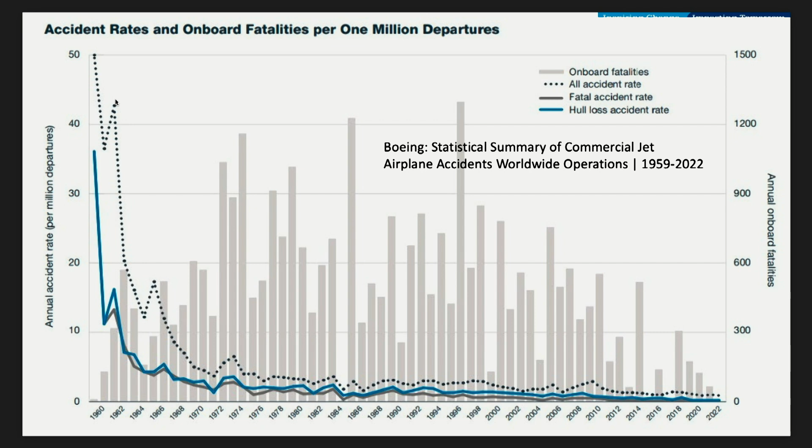And the historic approach was to focus on single point failures. Make certain that you didn't have some unwitting accident. And looking back through aviation safety, we have those flashbulb moments, those accidents that we in the discipline remember profoundly and that the entire industry used to drive our new insights as they reflected what was going wrong.

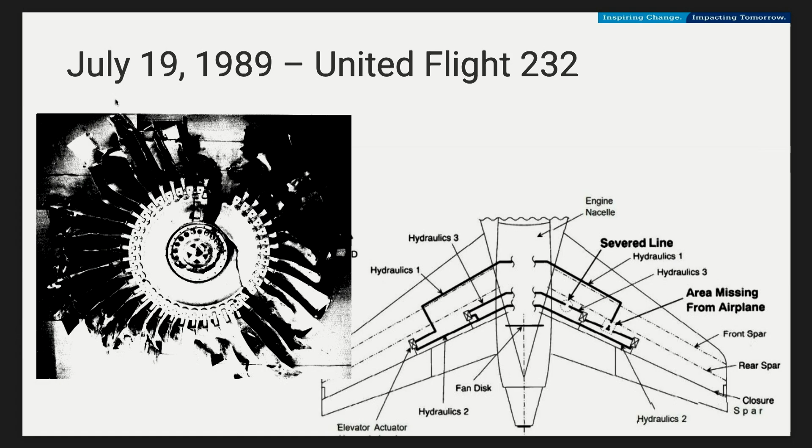For me, perhaps the first flashbulb moment, and one that's really important to this more modern age, was United Flight 232 in July of 1989, where the fan disc in engine number 2, which was mounted in the tail, right above where the 3 hydraulic lines all joined together, needed to power the control surfaces, well, the fan disc blew. And while there were many things leading up to the fan disc blowing apart and blowing through the hydraulic lines,

it, in the end, highlighted that at that instant in flight, given you had a fan disc that had design and maintenance issues, that in flight we had a single point failure. Now, I particularly recall this because I was a freshman in what was then called the MIT Aeronautical Systems Lab. We gathered around this thing called the TV and watched live news to watch it.

And the McDonnell Douglas engineer who was briefing CNN was holding a schematic and pointing everything out, and his brass rat was going up and down in front of the national news as he described just how we had gotten to the point that one single failure could make an airplane, well, at the time they said it should have been considered unflyable.

The second lesson that we learned that day is that in many cases, safety ends up being a factor also of people being able to come together and work together in new ways. For Denny Fitch to run back from his passenger seat and be able to work the throttles while the crew already in the flight deck flew around a while, learning to fly the airplane only with differential thrust and elevator trim, to the point that they had something roughly approximating a landing, and something where we would have expected everyone to not survive, to instead have 2/3 of the people survive.

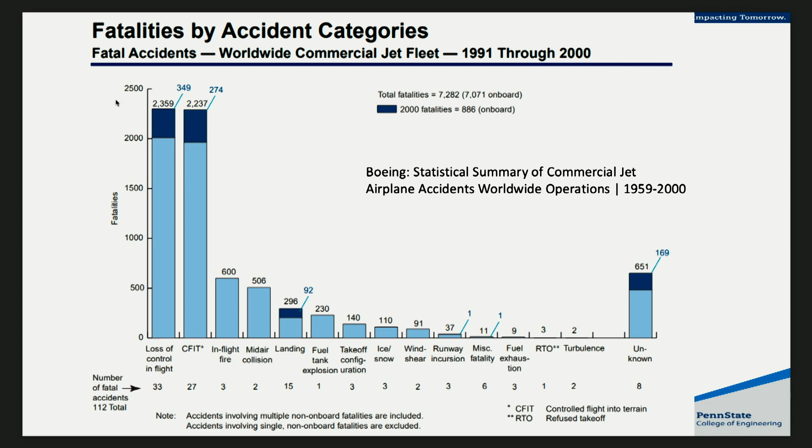And with this, here's the data on jet aircraft accidents for the period 1991 through 2000. It's divided, each bar representing a different category of the major descriptor of the type of accident. In this case, look at the two big bars that we had in the 1990s, the leading types of accidents, loss of control, and next to it, CFIT, controlled flight into terrain. And the Cali accident is a major part of that big bar of the fatalities that we were seeing because pilots couldn't tell where the airplane was going relative to terrain.

Let's skim forward to the most recent set of data that I have, 2013 to 2022. Can you find CFIT on there? It's down there. It's down in the noise. It's one of those small bars. And so we can see cases where some of these advances we can point to as having such profound impact, like the enhanced ground proximity warning system.

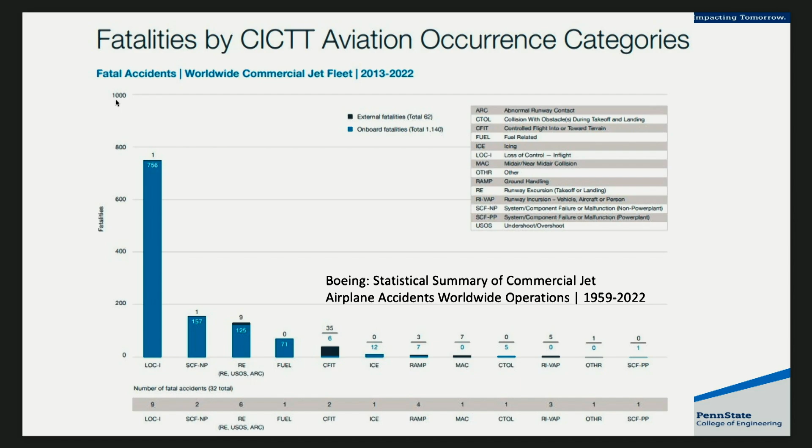That's the good news. The bad news is that how do you make a system safer than this? How do you address the more complex and interrelated accidents? For this, I would point out that you have to do many things all at the same time. As engineers, we normally start by looking at the single point failures, the reliability and redundancy, the fault tree. And this is necessary, but is not sufficient.

Then we look at creating multiple layers of defense, robustness. And these layers of defense can include pilot training, procedures, and maintenance, and making certain that the pilot doesn't have the fan disc blow apart in the first place. Necessary, but again, not sufficient.

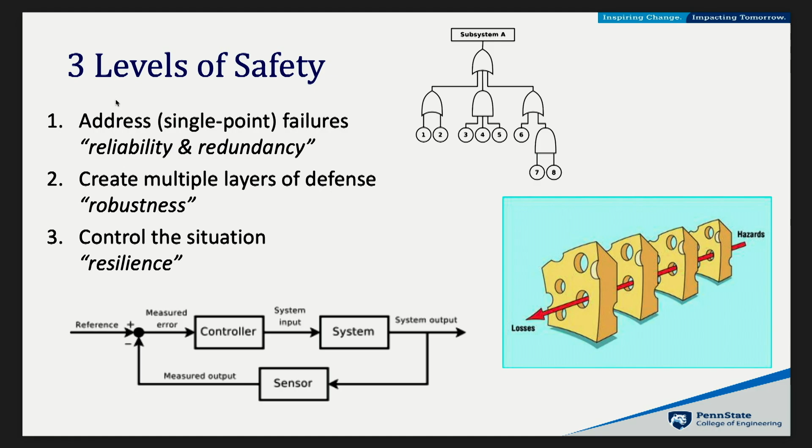And finally, we find that we have to also look at how we control the situation. And the levels of control, again, are operational control, traffic flow management, so you don't have a pileup of airplanes in the same sector. But specifically important is how do we control the situation right at the point of the incident, of the problem, the pointy end of the stick.

Now, there's multiple layers of control, but hey, it's always fun to talk about autonomy and autoflight and to talk about how control automation has shaped the flight deck. So here's a picture of an aircraft designed and first flown in 1969. You can see that there's 4 throttles, 4 stacks of engine instruments, and there's even a flight engineer over here, a third pilot in the cockpit. So I hope you can guess, if you're in this auditorium, what airplane this was.

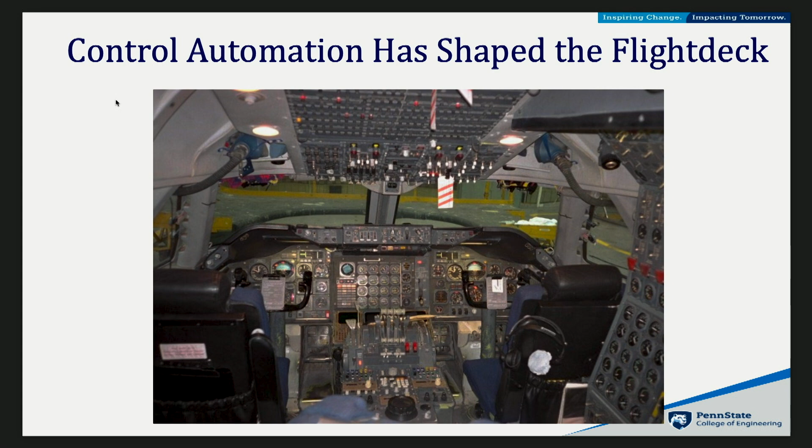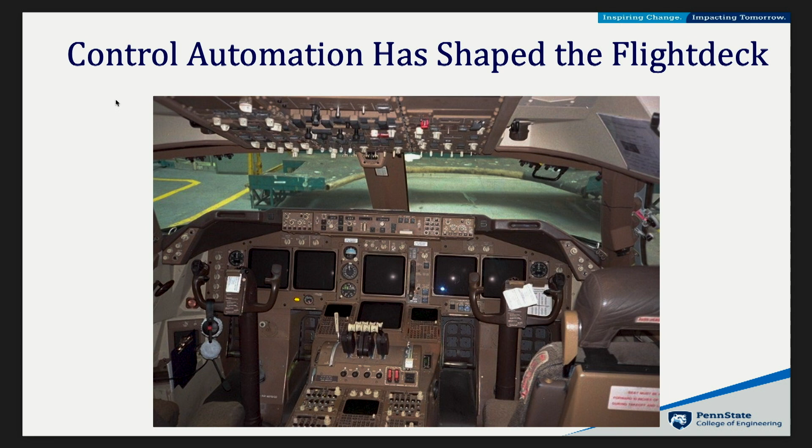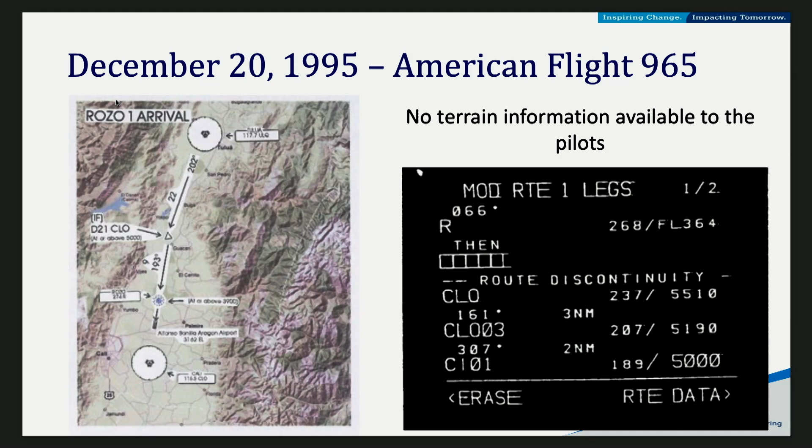And why did the airplane try to fly through a mountain? Well, the airplane logic was suggesting go to waypoint R and then join the route into land at Cali. And the pilots had very poor understanding. What does this mean? Should I have even gone to point R in the first place? And the answer is no.

And so here now, we're also starting to think not just about the single technology, but how do we get the parts to work together? How do we get, particularly close to my own heart, the pilot and the technology actually working together better?

And again, we can point to some things in this time in the 1990s where Eric Johnson and I met each other by doing a class project for Tom Sheridan and John Hansman, where we proved that in the Building 37 simulator, it was pretty easy for me to put the captains in what would be an innocent mistake into a steep descent into terrain, and most of them to not detect it until it was too late to pull up.

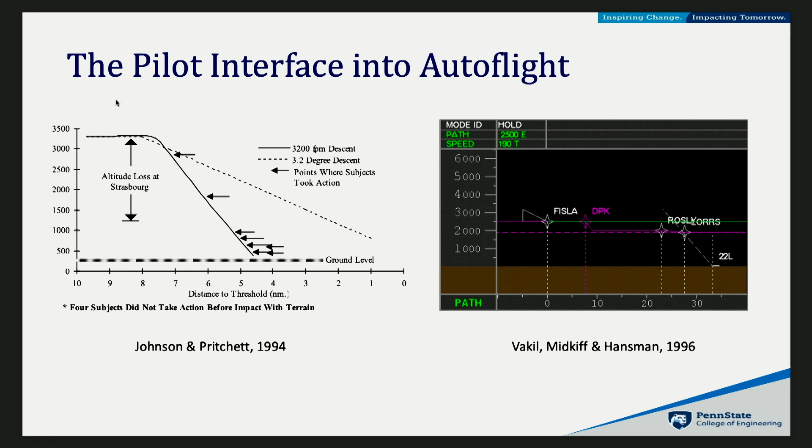And on the right, I'll show the vertical profile display, recognizing Sanjay Vakil, Alan Midkiff, and John Hansman here, that emphasizes not just where are you in space and time in a vertical profile, but where is the autoflight system going to take you with the way it's programmed right now. A display that I think we can now pretty much point to in the A380, 787, and other subsequent aircraft.

So with this, we're working on many new questions about how human and machine interact. We haven't answered them yet. Aviation, I think of as the leader in human factors. And for this, I point out that in 1951, it was a National Academy study chaired by Paul Fitts looking at effective air navigation that posited this model, a model I wish could be burned at the stake and tortured for its value that it doesn't have, called "Men Are Better At, Machines Are Better At."

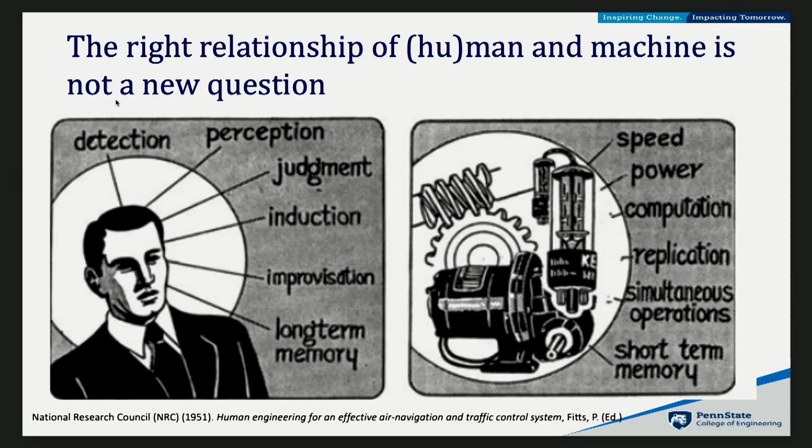And I mind not just the genderized language, but the fact that it doesn't understand that the two of them need to interact, and it doesn't understand something fundamental about who ultimately controls the situation. For that, I think we should go back to the federal aviation regulations. Who controls the situation? The pilot in command of an aircraft is directly responsible for and is the final authority as to the operation of that aircraft. And what does that mean? It means that as the captain, you engage the autoflight system.

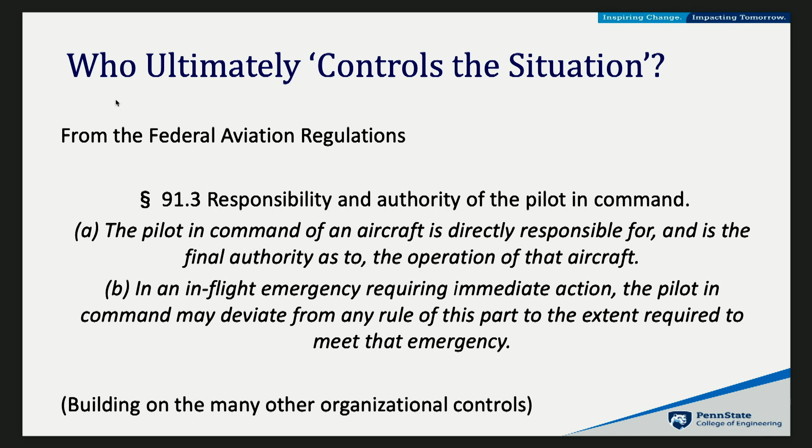There's a 1996 Simpsons episode. It says, once you engage this Navitron system, all you have to do is sit back and feel your ass grow.

We're not recording this, right? I'm just quoting The Simpsons.

Okay. But no, as the pilot in command, you now have to sit there and monitor it. How often do you need to monitor it? As fast as it can screw up. For an autopilot, that's pretty fast. And then you need to figure out when to intervene, and to intervene before it is critical. And this is not easy.

Now that I'm a department head, I can assure you, monitoring and supervising and intervening is harder than just doing the task yourself. And yet this is the task that we are putting pilots into. To put them into a tough spot, we say that their role is shifted to monitoring.

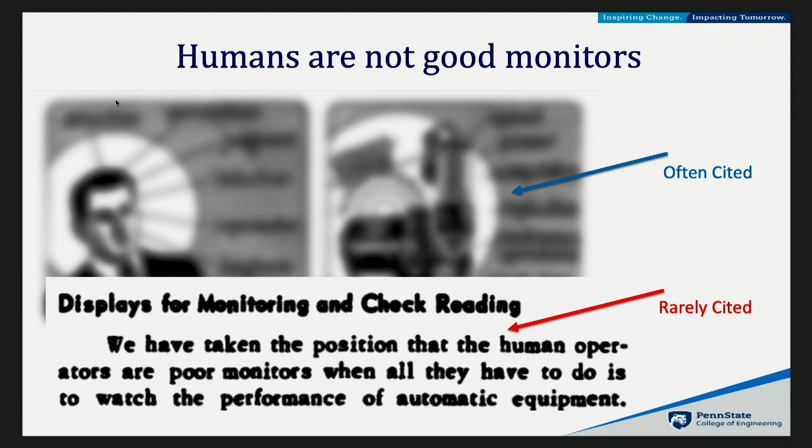And yet, there were brilliant things said before in that 1951 report. The MABA-MABA list was embraced by the controls and autonomy engineers as, yeah, I can get my machines to do these new things. And it's commonly cited. Rarely cited is what's on the next page. In 1951, they took the position that human operators are poor monitors, when all they have to do is watch the performance of automatic equipment.

And so with this, we are at a very interesting time where we are seeing public-private partnerships in aviation safety, broad discussions throughout the industry talking about, wow, what do we need to do differently? Not just focusing on one system or one technology, but looking at broad operational principles.

And so now moving forward to 2013, the safety alert for operators was actually recommending that we have pilots fly more often. Maintain not just the manual control skills, but we're now finding that you need those same manual control skills also to have the mental skills, the knowledge, the task ability to monitor in the first place and detect when something is not going right.

Finally, bringing us up to the very latest stage, pointing out some things again from the national academies that we're working on, we find that the same names keep popping up in these national level committees that are coming together to look at the current state of aviation safety.

In our overall review of the aviation industry's ability to identify safety issues, our summary is that there are many ways that we are monitoring air transport safety right now, as based on the tube and wing aircraft that are flying, the operational models that we have at this point. They span from single organizations to industry-wide teams like the Commercial Aviation Safety Team. They span deep dives on particular hazards to things that are monitoring system-wide.

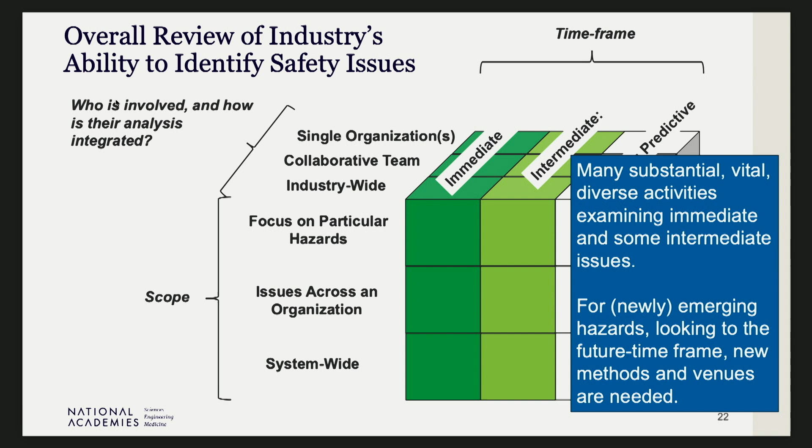And in this, we now have the mechanisms in place to be jumping on any immediate issue and extrapolating forward. What do we think are the intermediate, potential near-term evolution issues? But the predictive is a little hidden off on the right of the Rubik's Cube. Predictive, how do we predict the safety of something that's never flown? Some new AAM vehicle that's brought in, or eVTOL aircraft flying with a very different business model, very different traffic density and traffic operations. For this, we need new methods and new timeframes.

And this is in the face of all the amazing things that are happening in aviation right now. Each of these things we can look at going, wow, we can do new business models. We can have transportation that gets above the gridlock of Mass Ave. We can have new technologies that are so much more efficient. We can help with sustainability and climate. But at the same point, we also then say, and how do we predict the safety impact to maintain the safety level for things that we don't have that same weight of knowledge for?

An interesting time. If I had an answer, this would have been a different talk. But as it is, I'm just saying this is where we are now with big questions left to be answered. And so I thank you, and I offer apologies to similar important technical advances in addressing aviation safety, including icing, wind shear, collision avoidance and detection, and so forth. Thank you.

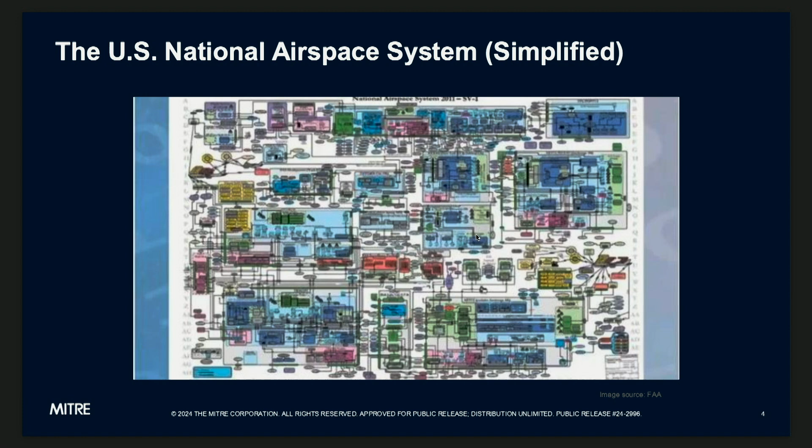And finally, aviation is all about weather, also terrain, but also all about weather. And as I went on to my career working on the National Airspace System, I really began to appreciate all the ways in which that is true. Now, one of the things that I found as soon as I left MIT was that I was now at a company that was supporting the entire development of the National Airspace System, and I lamented the fact that the one course I never took in aviation at MIT was air traffic control. So I had to learn all of that.

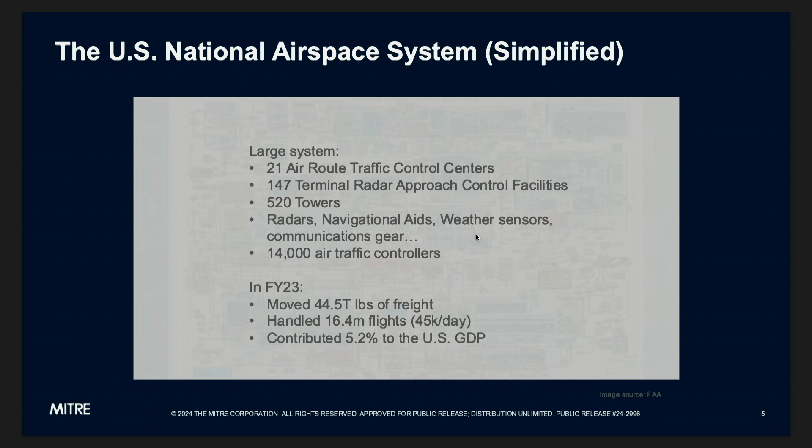Safety is the #1 priority, and as Amy noted, the current safety record is excellent. And so everything that needs to be introduced has to be compared to that record, which I'm sure Brian will probably get into later. So over the 31 years since I graduated, a lot of things have happened in this system. There's something called the Next Generation Air Transportation System that was deployed, and this revamped all of the primary automation systems.

There were a lot of jokes back in the day about how the FAA ran systems on vacuum tubes. To my knowledge, there are no more of those. I'm not entirely sure. There may be in Alaska some weather systems that have vacuum tubes in them, but for the most part, the system has been deployed, and we move a lot more people and freight today than we did back when I graduated, and the delays are generally not worse, which tells you it's working.

So that's kind of the state of the art. Over the course of that time, and where much of my work was, is in that the science of air traffic flow management has changed radically. Back in the day, 31 years ago, the FAA controlled everything. Now there's a collaborative decision-making process where the airlines and the DoD and other operators take part in the management of the system, and that's been a major advance.

Weather forecasts have improved, traffic management tools have improved, and so our ability to do more than just keep aircraft from hitting each other, but rather to make the whole system more efficient has improved. And we've gone to something called trajectory-based operations, and what this means in practicality is that when things get incredibly dense at an airport, we can manage the flow by time of arrival. And because of the deployment of GPS and other precision navigation systems, aircraft are much better at following those things, provided that the pilots are interacting with the system and not just watching it happen, right, as Amy was just talking about.

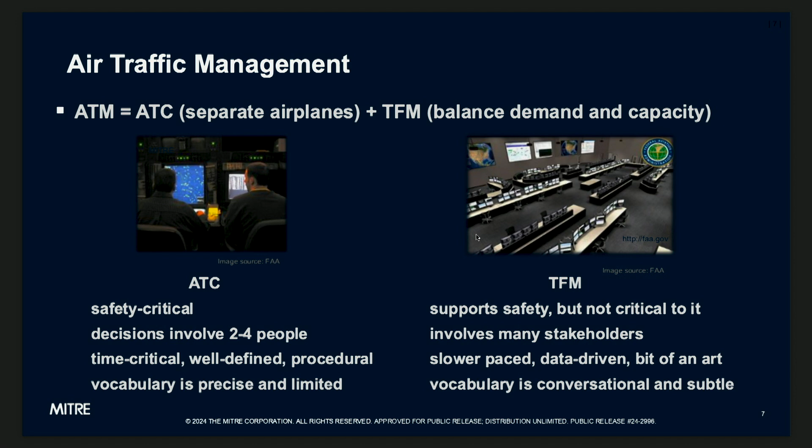But traffic management, where you're looking out, say, 30 minutes to 24 hours to plan against things that are probably going to happen, is something that has been evolving quite radically over that time. And it involves many, many stakeholders. It's a bit of an art. And honestly, there are a lot of still unsolved problems in this. And so that's where I'm going to spend a good bit of the time in this lecture.

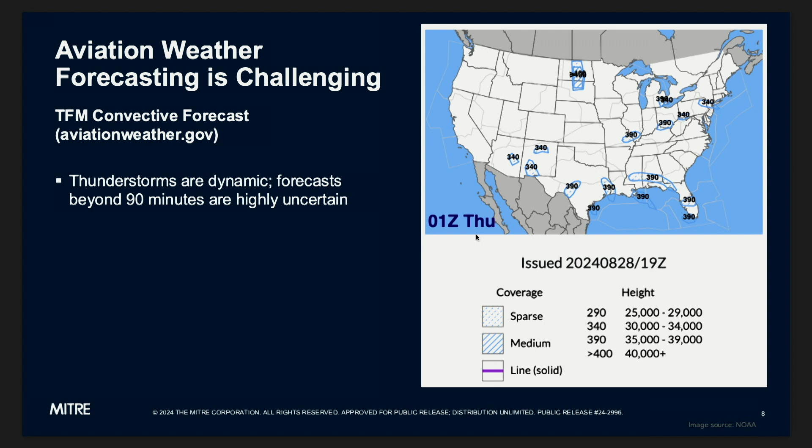So to get back to weather, aviation weather forecasting is challenging. It's one thing to know if you're going to hold a picnic that there's a 30% chance of rain this afternoon. You need much, much more precise weather to do anything with aviation. You need to know whether particular routes will be closed, whether airports will be closed, or will be impacted by low visibility. This is an example of the absolute state of the art in long-range thunderstorm forecasting. Each of those areas, which are hundreds of miles long, tell you that there's maybe a certain likelihood of thunderstorms happening and what the likely tops of those would be.

Planning to this is not trivial, nor is it precise. And so the essence of the modern system is flexibility. You have a lot of tools to manage flows, and so the challenge is how do you react to something like this? Under 90 minutes, we know we can watch thunderstorms move, and we have a pretty good chance. So what I'm going to talk about are some of the tools that I've been involved with developing, applying the lessons that I learned here at MIT to help develop and deploy, and some things that we haven't solved yet.

So one of the first things I got involved with when I left here was in trying to support this collaborative decision-making process by giving traffic managers what you would think would be a very simple thing. There's weather. We have a pretty good idea of where it's going to be. How do we know which airplanes are going to encounter it? And what do we do about it? So again, simple problem. They had no way to do this, right? You were doing this incredibly manually.

And so we actually put a trailer out at one of the centers and put a bunch of computers in it, and we let traffic managers come out and play with it, looking at the real data and do some tests, to get back to human-centered design. And come up with a system where you could draw a polygon or a line, and you could add a bunch of filters to it, and it could move. And what it would fundamentally give you in the middle of the screen there is a list of which flights were involved and how many were encountering it as a function of time. And what we found was if you give them something like this, and it was deployed in what was then called the Enhanced Traffic Management System, they would find a million ways to use it.

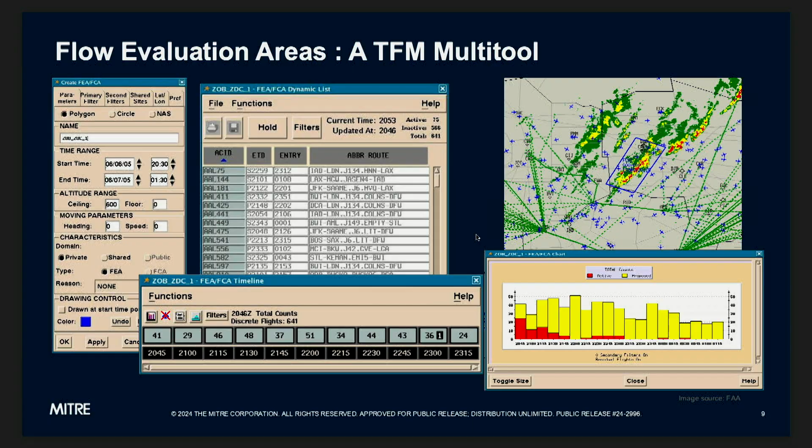And so this tool actually is the basis of a lot of the things that cause your pilot to say, while you're sitting on the runway in perfectly clear weather, we can't leave because of air traffic control hold. That's actually a good thing, believe it or not. But there are things called airspace flow programs that keep us from overloading sector controllers near these weather areas, and a whole host of other what we call traffic management initiatives that are planned by the use of these

things. And one of the things I learned from this was that if you give people a flexible tool, they will find all kinds of innovative ways to use it that you probably didn't even predict. But the most important thing about giving any kind of tool to people who have essentially a full slate of work on their plate is that the first thing it has to do is save time. And that's what computers are good at. Have the computer do the things that are drudgery, the things that are difficult, right? But have it be an interactive part of the process. And this was a great example of that.

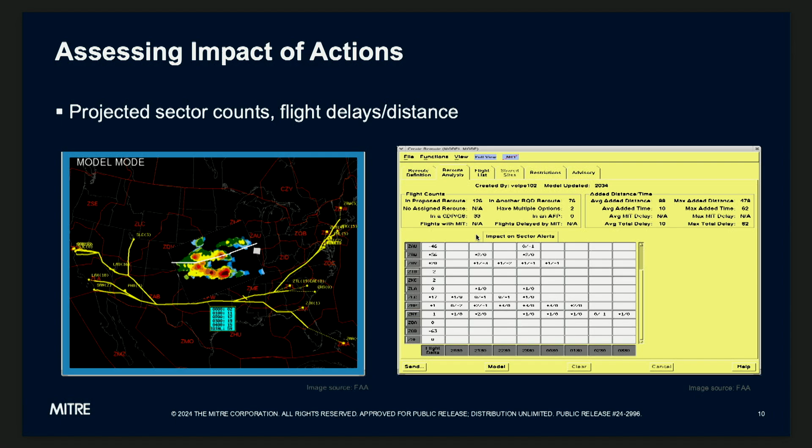From the time that this was developed to the time that it was deployed was 17 years, which is on the long side. I think the average time to deploy a new feature to the NAS is about 10. But this is what happens when you're working with a system that has to work all the time. And it's an argument I get into with my military colleagues all the time on the other side of MITRE, where they can deploy something in 2 or 3 years, and the difference is ours have to work all the time. A military system can work 95% of the time and still be acceptable and still give you an advantage. And that's a huge difference when you're working in an air traffic control system.

The next step beyond this was to start thinking about systems that suggest solutions. And this is an example of one that we worked on, and it employed some NASA ideas as well. But basically, the idea would be, instead of having to develop those routes and do what-if examples to test them and so forth, you could actually identify, for each aircraft involved, what would be a reasonably optimal route to get around a weather situation, coordinate it. And one of the big problems with rerouting is you have to collaborate amongst facilities. And so this would automate that coordination.

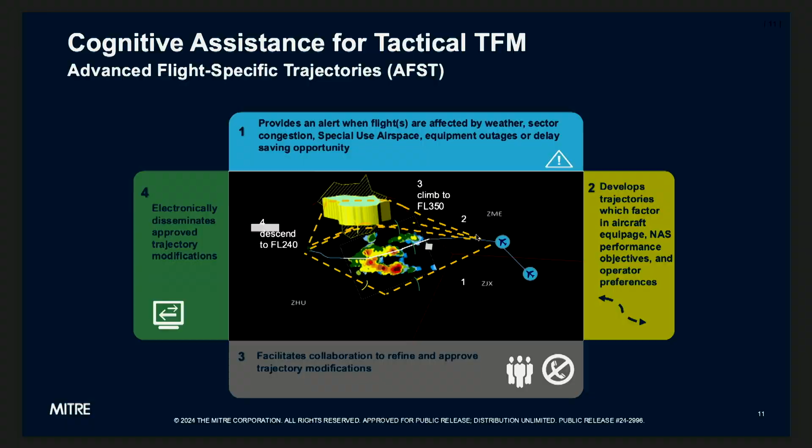Again, we did a bunch of human-in-the-loop testing and worked through it until they were satisfied with it and thought it would work. It was put into the deployment pipeline, and then the funding dried up. But it is a possible thing to do. It's still potentially on the list, so maybe someday we'll see something like this. But to date, we don't move aircraft one at a time. We move them in giant groups. So that's still the state of the art.

And the last system I wanted to talk about was the problem of strategic TFM. The stuff that I was talking about before, you saw pictures of weather. That means we had either weather radar returns on there, or we had short-term predictions where you could actually draw essentially where you thought the weather was going to move. But strategic TFM uses that initial weather picture that I showed, which is that I have a vague idea of where the problem's going to be 12 hours from now, 6 hours from now, whatever it is. And I have a bunch of aircraft that are going to take off and maybe spend 5 hours in the air. What do I want to do?

There's a couple of problems with this situation. Number one, typically when humans are solving a problem, they rely on past experience. You never get the same weather day twice in the NAS, really, right? And so it's very hard to learn from experience.

The other is you have a bunch of stakeholders involved that have different objectives. The FAA folks want to protect their controllers so that they continue to safely handle the aircraft. Airlines obviously want to meet their schedule. DoD wants to execute their mission, so on and so forth. And so it's not clear what winning looks like either. So it makes it a hard problem to solve.

So the way we do this today is that every 2 hours there's a teleconference where we argue about what the right solution ought to be and pick some set of solutions out of an infinite design space and then see how they work. And then 2 hours later, you go back and have another argument and work on the next thing. And so for years and years, we've been trying to design systems that would solve this problem.

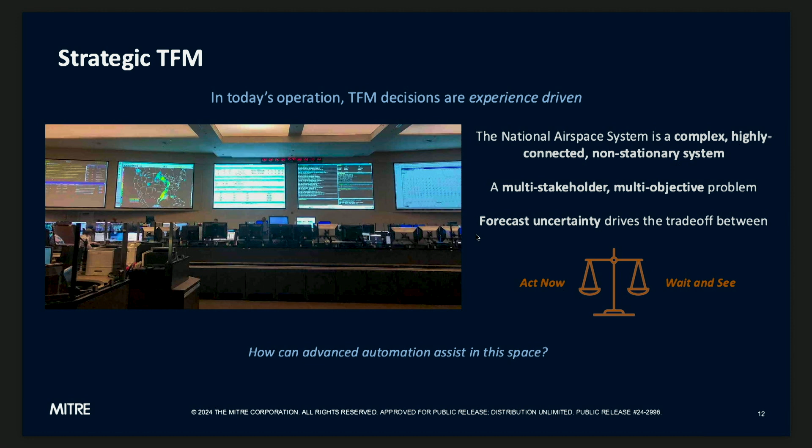You're looking at a picture here of the Air Traffic Control Command Center in Northern Virginia, where they coordinate this argument. And the data that they have is the weather forecast that you saw and some other weather forecasts. They have counts of traffic around the area. And of course, they still use those flow evaluation areas that I showed to kind of look at what traffic is where. But there aren't really any diagnostic systems to do that.

So you can't have a talk today about aviation without AI coming into it someplace. And so this is where we're trying to apply modern artificial intelligence to solve that specific problem. And past attempts to solve this problem using previous kinds of technologies have generally failed due to the same reason that it's hard for humans to solve this problem, which is that it's very hard to draw conclusions about what worked in the past because you don't really have great data to work from.

Modern machine learning systems, it turns out, can piece things together pretty well from a whole variety of vaguely similar situations and draw better conclusions. And so for the first time, we think we've found something that can help people navigate this enormous design space. And to give an example

of what these kinds of problems are, I don't know, what's the time situation? I haven't lost track. We're good? Okay. So I'm just going to go to this, actually.

To look at a real example, here's a very simple air traffic management example. Something's happening, in this case in the Atlanta area, and you might have low ceilings at the airport. They'll reduce the arrival rate. You might have weather that's occluding the fixes that supply that traffic to it. And you could say, well, I could control with a ground delay program the arrival rate over the next, say, 4 to 6 hours.

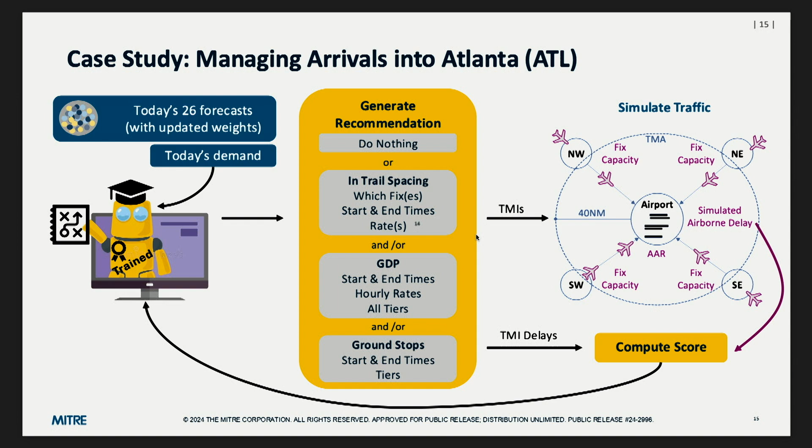And then you take that against the fact that you have variation in the weather. And so we actually have forecasts now that are ensemble forecasts, that generate a whole series of possible weather outcomes. The one we used for this happens to generate 26. And so the question is, over all that possible range of outcomes, what are the best designs for solving that problem? With all the things we've tried in the past, we've actually been able to solve it and come up with reasonable solutions, but the compute times range in weeks, which obviously isn't terribly practical for a real-time system.

But using AI methods, actually using a method that was tested to play StarCraft, we adapted it to this, and it does find a reasonable solution for that. So there is some promise that we can finally bring some science to the traffic management process, and it's time, because the system is now entering a period of change that we haven't seen over those 31 years.

Amy mentioned tube aircraft, standard commercial aircraft. That's been the bulk of the concern of the FAA and the aviation community for all of that time, and that's really beginning to change. We have small UAS at the low end of the spectrum, small unmanned aircraft, Amazon package delivery type things, and so on and so forth. That's a new operational design. Urban air mobility aircraft, such as Brian's potentially going to talk about, eVTOLs and air taxi type things, which are potentially revolutionary for short range and for regional mobility.

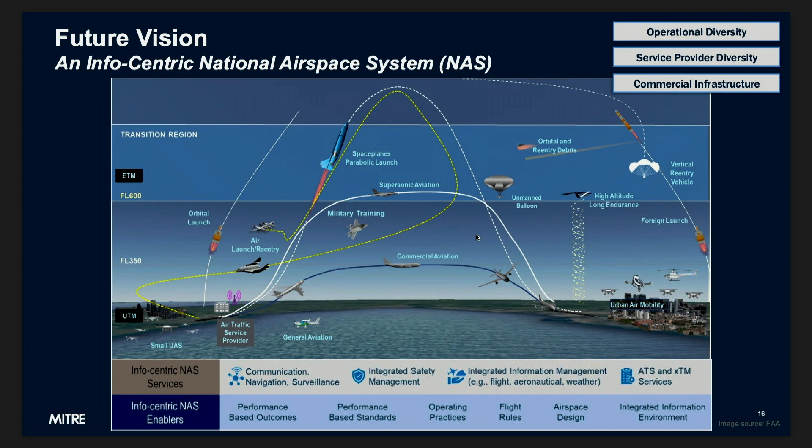The tempo of space launches, you probably noticed, has gone up radically. We're now launching almost every day. And every space launch is a challenge to the airspace. It blocks a bunch of airspace and so on. And so, at high altitude, we're potentially going to start having supersonic aircraft that behave quite differently from traditional aircraft.

And so, in the face of this, if we're going to maintain and achieve the economic benefits of these new types of aviation, we have to really improve the way that we handle traffic. And not only that, the traditional FAA model, where we talk to all the airplanes, is no longer viable, right? And so, some of these operations are going to have to be handled by private service providers that will have to deconflict, for example, these small package delivery aircraft. And the FAA is going to have to be comfortable enough with those operations to certify them and say that that's okay, that's safe enough.

So if you're looking for problems to solve, on this slide are lots and lots of problems to solve, a lot of great thesis topics, and I'm sure John can tell you which ones are most important.

So, just back to what I learned as I tried to apply those lessons. Human-centered design is hard. Over the course of trying to get things deployed and understanding how they would work in the National Airspace System, we've gone through a whole bunch of experiments, some of which were inspired by those original experiments we did on that Iris 2400, which I found a video about where it said it could render dozens of polygons several times per second, which I thought was excellent. We have better tools for that now.

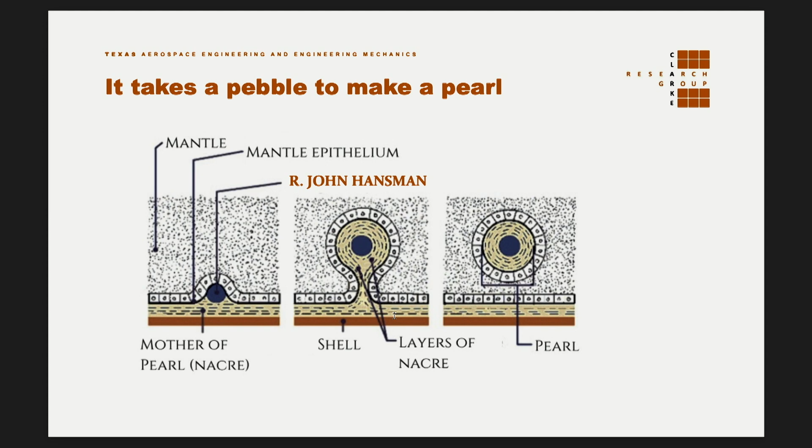It's still my line. I'm not saying he's an irritant. However, I do say that his demand for critical thinking has been the pebble that has made many a pearl. And forgive me for focusing on only two of these pearls, or three of these pearls, but those are closest to me, so I can speak most authoritatively about them.

So the first pearl is the work that's been done on environmental considerations in approach and landing. And I still remember the day when I got back from JPL, and John said, what do you want to do, after I finished my master's thesis, which was on quantum receivers, definitely not aerospace. And we started talking about new RNAV procedures and GPS and what you could do with that. And we started coming up with the concept of using GPS and RNAV procedures to change the way we operate airplanes to reduce noise.

So there's been some earlier work done in the late 60s, early 70s, but they didn't have the kind of capabilities that we had at the time, which is even baby compared to what we have these days. But at that time, it was state of the art. And so there was one thing that, in addition to critical thinking, was a holistic view of the problem. It wasn't just putting something in a numerical simulation and running it. It was actually bringing the human-centered design, which both Amy and Craig spoke about.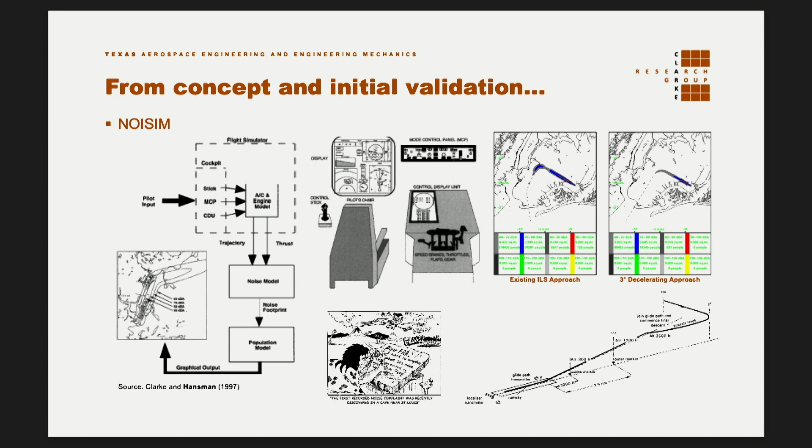And on the top right, you can see what resulted from our studies. This is the arrival into New York. The left image is the one for the current procedure. The one on the right is for the procedures that we ended up designing for New York. As you can see, the contours are way smaller. That said, we still had that caveman, chiseling away, complaining about the noise. So noise stayed with us forever. And I'll get back to that when I get to the third problem.

So after that work, when I joined the faculty here, I had a student, Li-Ling Ren, and we took that work, and then we did some flight tests at Louisville in 2000 and 2002. And we developed a very rigorous simulation that could model the wind fields and all the aircraft dynamics, and we were able to predict how far apart you needed those airplanes so that they could be at idle from the top of descent to the runway, and not run into each other.

And we did the flight test at Louisville, and I've got to tell you that there is something about doing numbers and trusting them, because the first night I wasn't there, and we told them we need these airplanes 15 miles apart. And they called me, you sure 15 miles? It's like, Li-Ling says so. I've looked over the calculations. We're going with 15 miles. Trust me, my fingers were crossed, my toes were crossed, everything was crossed, but it worked out.

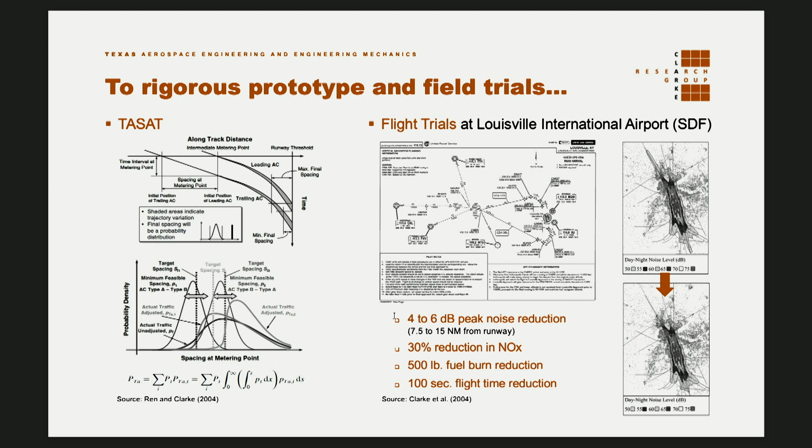And that experiment basically showed, and we had a bunch of noise monitors around, how we could significantly reduce the noise contour, like we did in the numerical studies in the lab. So we moved from the lab to prototype and field test. But we also found out that there were incredible benefits in terms of fuel savings and time savings. So it went from more than just noise, it now became how do we design approach and arrival procedures to deal with the environment.

So following on this, when I moved to Georgia Tech, we basically took that flight trial, made some improvements in how we specify procedures, and then we ended up designing the arrival procedure which everybody who has flown to LA since 2007 has flown, which basically is the RIIVR arrival into Los Angeles.

And this one, we had to actually then, going now beyond just the higher fidelity simulations and all the modeling, we now had to do things like, if you're going to change the procedure, you have to make sure that the pilot doesn't have more than 4 or 5 button pushes. Because if you have them down on the screen in their mode control panel, button pushing to change your runway from 25 left to 25 right, you're going to have some safety issues. So we had to incorporate all these things.

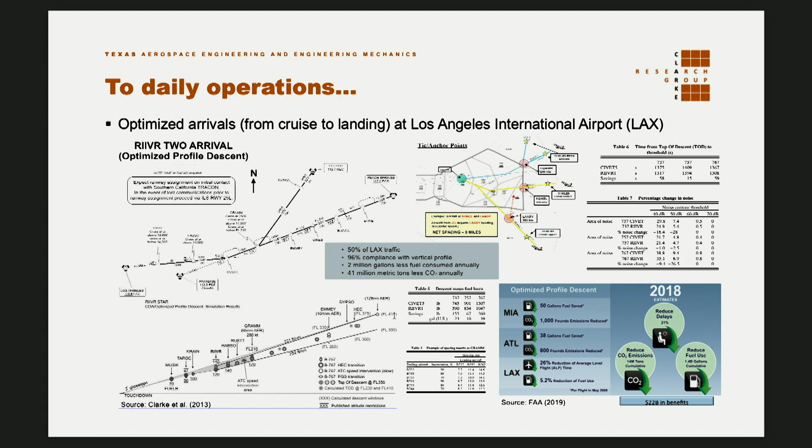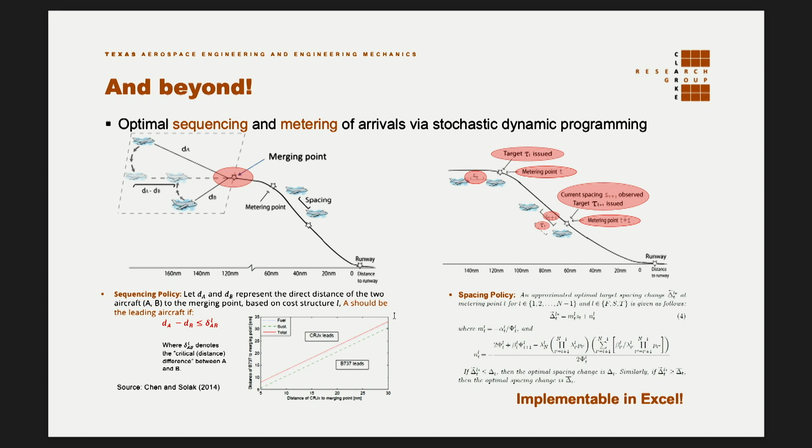And on the right, you see the savings, that we're saving about $22 billion in benefits in 2018. And this procedure is now spread across the world. So from that conversation and a concept, from lab through prototype to the real world. And it continues because my student and his student, John's grandchild and his great-grandchild, went on to do work and develop some POMDP algorithms to actually jointly set the spacing and the sequences for arrivals. And this can be executed in Excel. Again, making it simple. So that's a pebble that's turned into a pearl.

Another pebble that turned into a pearl is in surface operations. And this was in 1999, and there are a couple of people who are in the room here, Husni Idris, Yanis Anagnostakis, John Amadeo, et cetera, who were involved in this project. This was the Departure Planner project. It was a blue sky look at how do we change surface operations. And so much of the work there was actually analyzing the operations at Logan at different airports and also looking at the ASQP reports to see where were the biggest sources of congestion, what were the constraints. And everybody would say, well, gates and their runways.

But on the bottom left was probably one of the most interesting results, that the air traffic controllers were themselves a constraint. Because there is a flow of aircraft on the surface, but in the air traffic control tower, there's a flow of flight strips. And when an air traffic controller is overloaded, they're going to say, wait, I'm not going to give that command. So the airplane might be ready, but the air traffic controller isn't. So those two flows have to be synchronized if you want to have a properly functioning system. And we're doing stuff on electronic flight strips, et cetera, to try to deal with that.

But we also saw some other interesting results. The middle one at the bottom shows this behavior which became swapping. So when you push back these two airplanes at the same time, it's a race to an intersection. Any uncertainty in the taxi speed gets magnified because if I get in front of you, I have a minute or 45 seconds at the very least ahead of you before I take off. So for years, we couldn't figure out how to accurately predict taxi time. That swapping behavior allowed Husni to actually figure out how to better predict the taxi times.

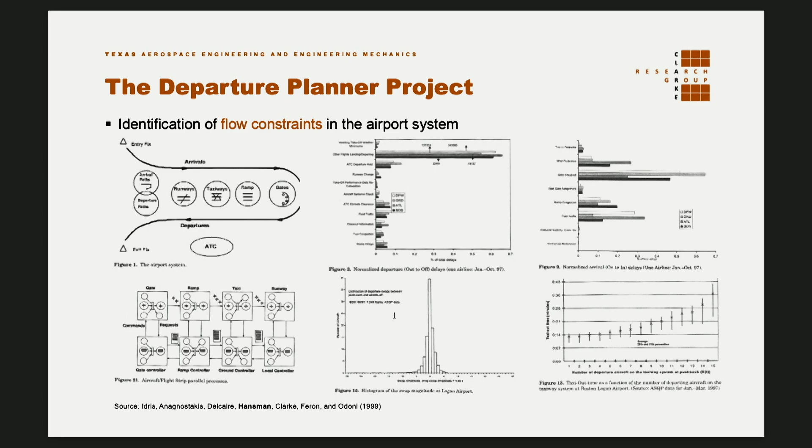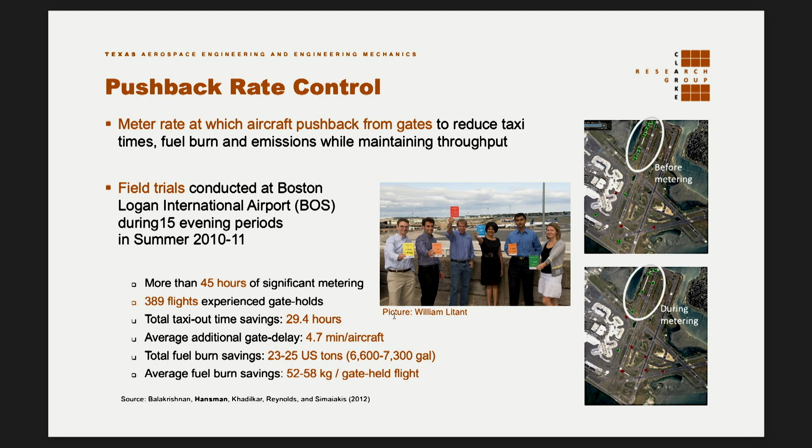So this led to the work that John went on to do with Hamsa and Tom Reynolds et al. on the pushback rate, and I got this picture courtesy of Bill Litant via Hamsa, of them at Logan, again, from concept to field trials, where they actually did regulate the pushback rate to keep the number of airplanes that are taxiing out in check. And you can see top right, all the airplanes in green piled up at Logan. Bottom right, basically you see a much cleaner taxiway and a shorter queue. And you had significant savings in both time and fuel burn, et cetera, from that as well.

So when you look at integrating the cool new airplanes that John Langford and Brian are bringing to the world into the urban environment, there are lots of challenges. Of course, noise is one. There's safety. There's availability of takeoff and landing areas. There's scalability of air traffic control, and Craig talked about that. And there's also the ground and communication infrastructure. All of these things exist.

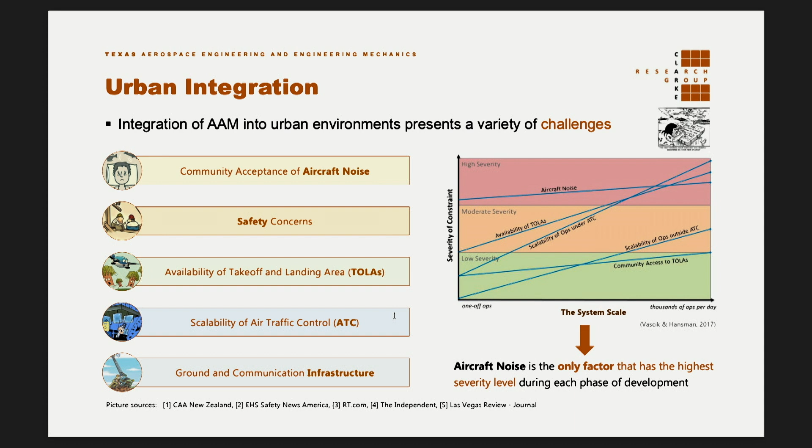By the way, I do want to invent a new sport for the Olympics called drone shooting. And you should have one set of programmers programming the drone to avoid the shots, and another one programming it to be a great shooter. You have offense and defense, so you heard it here.

So one of the things that my postdoc and some of my students and I have been working on, and also colleagues at UT, is looking at a holistic, again, back to that holistic viewpoint that we were all taught by John, and looking at how we manage noise, but we also have to think about how we manage energy. And how do we also make sure that we fulfill the demand that we have? And so we came up with this network flow problem where we're looking at Austin, Texas, because we know a lot about Austin, and we're right there.

And we created three air routes that mask over highways or cut across neighborhoods where you have significant industrial areas, where sometimes it's easy to fly over, other times it's not. And then we looked and said, how do we optimize all of these jointly for noise, energy, and package delivery? And the way you can do it: limit the operations, right? If you can't fly, you're going to limit. Or you can go to higher altitude, which is going to cost you more energy. Or you can fly along routes where it's noisy, like highways, et cetera.

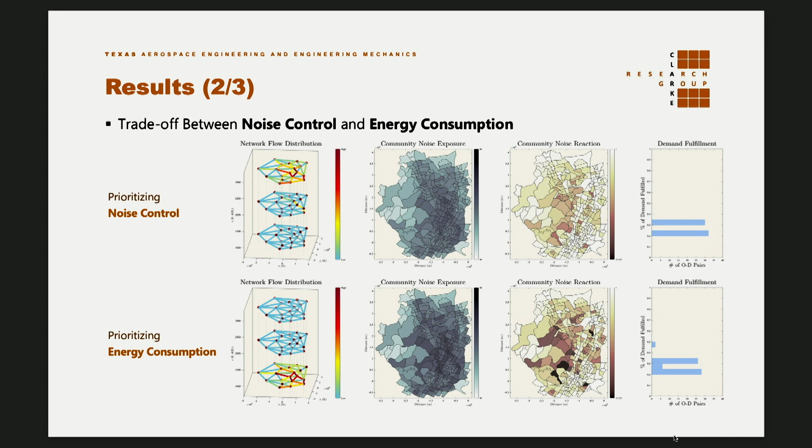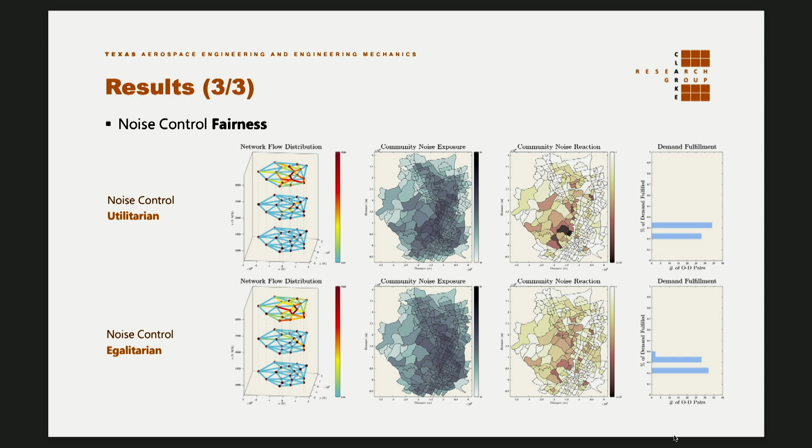However, if you have more stringent noise control, you can see here that the community noise exposure is lower and the reaction of the community is going to be lower, but you won't be able to fulfill as much demand. And so we also looked at prioritizing noise and prioritizing energy and seeing how those traded off. And then finally, we looked at some nice theoretical matters of fairness, whether it was utilitarian or egalitarian, and we showed how it plays out. So we have developed a tool which can allow you to determine how you design your network.

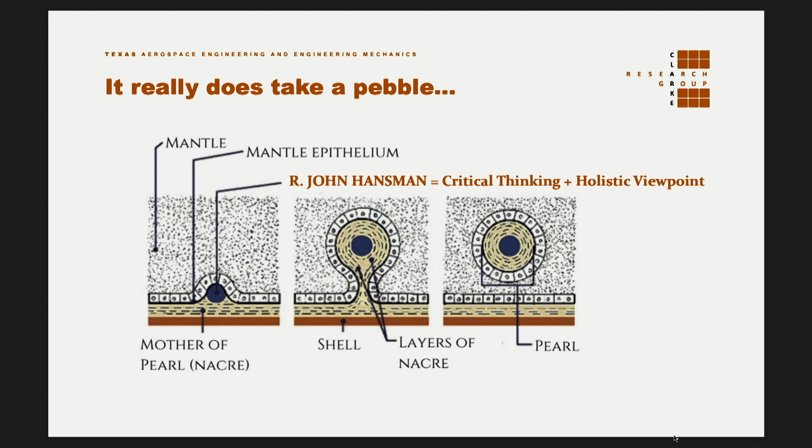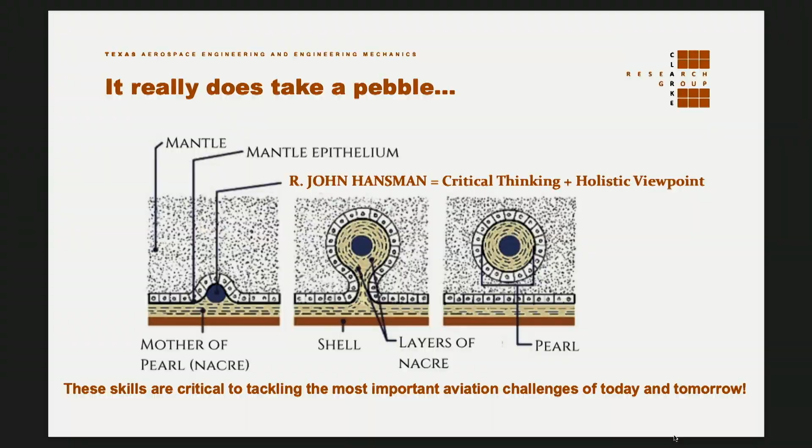So with that, I want to summarize by saying it really does take a pebble. And that pebble, in the form of R. John Hansman, has two, to my mind, really critical attributes: critical thinking and a holistic viewpoint. And to my mind, these skills are critical for us going forward in tackling the really important problems that we have in aviation today and tomorrow.

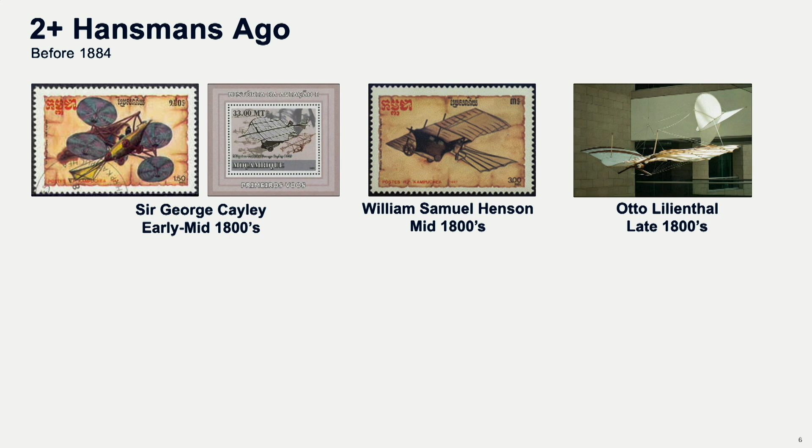So if we actually go a little bit over two Hansmans ago, the Europeans first started thinking about flying machines, actually the Brits, Cayley and Henson there, and of course Lilienthal, very initially successful attempts to fly gliders, unpowered aircraft, and of course Lilienthal, after thousands of flights, ended up unfortunately in an accident of his own creation and ended up dying in flight.

Following those in the late 1800s, groups of engineers got together in Europe, and they started to think about how do we actually power these things? Because people had started to realize that flying machines were possible, but it wasn't so obvious how do you power them. And so that was the first International Aviation Congress.

And I found this very interesting too, is before airplanes actually worked, lawyers got together and figured out in the late 1800s how to regulate them. That's actually true. You could look that up. I checked it a bunch of times. JT, if you don't believe me, blame JT.

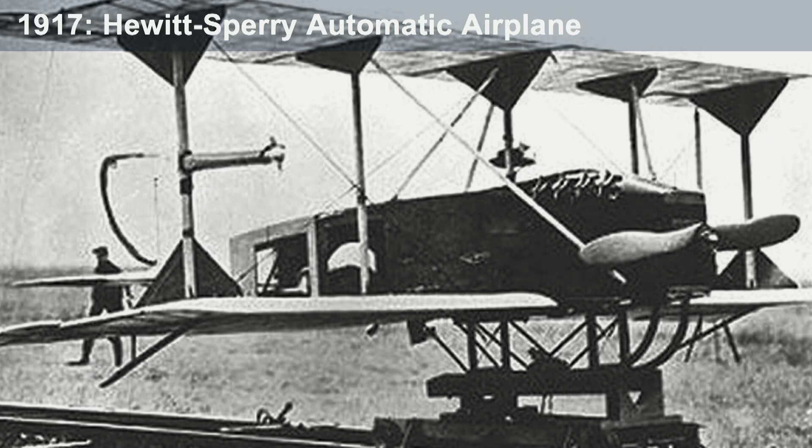So what usually happens when the Europeans get thinking about things is American entrepreneurs showed up and made it real. And this is my version of history. And so, of course, the Wright brothers in 1903 were inside of the two Hansmans now, followed by the first autonomous airplane. During World War I, these aircraft actually went one direction. They did not come home. The first commercial aircraft, the U.S. Mail Service, of course, started to fly these.

And a little bit over 20 years following the Wright brothers, of course, Charles Lindbergh flew across the Atlantic and reduced the time to cross the Atlantic by an order of magnitude. And I bet you that when the Wright brothers first flew, no one thought that that was possible 20 years later. So that's 20 years later.

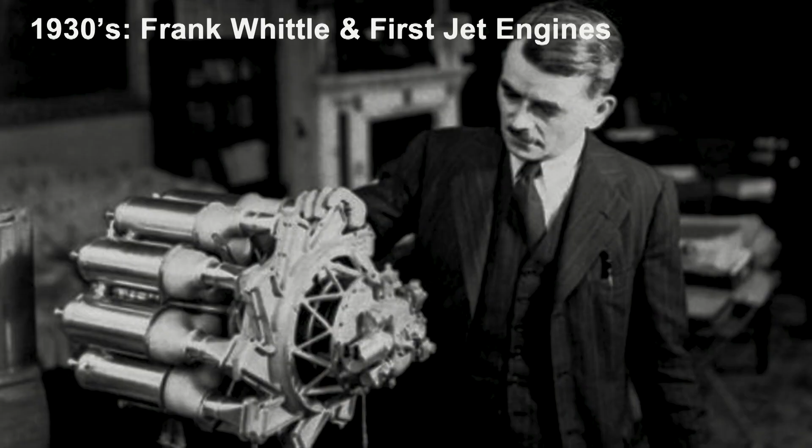Let's keep going. 1930s, Frank Whittle and the first jet engines start to appear. 1940s, I'm skipping over a lot of history. Many airplanes in World War II. Of course, we ended up breaking the sound barrier in the first supersonic flight in the X-1. In 1952, the world's first commercial jetliner. Okay, so that's the first of three Hansmans.

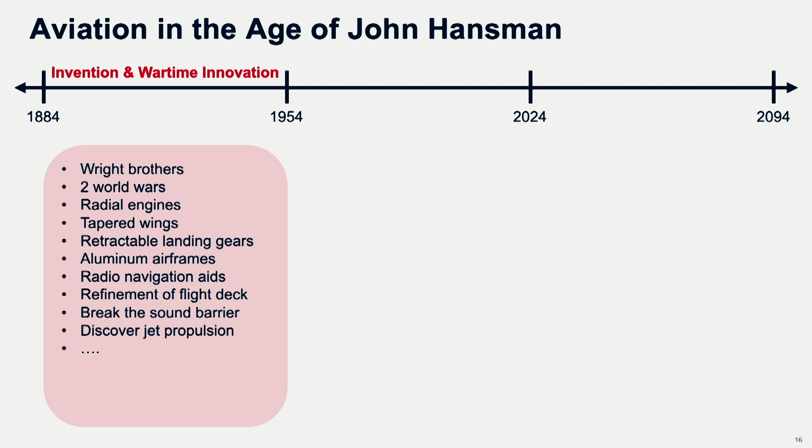1884 through 1954 was really defined by invention and wartime innovation. We went from the Wright brothers through two world wars, radial engines, tapered wings, retractable landing gears were invented, aluminum airframes were invented, we had the first radio navigation aids, we had refinement of the first flight decks, we broke the sound barrier, we invented jet propulsion, we had rocket propulsion. I can go on and on and on.

Okay, what's the second Hansman? So John Hansman was born in 1954, which happened to be the date of the first flight of my favorite airplane, the Boeing 367-80. This was when Boeing was incredibly bold and bet the entire company on the prototyping of a jet airliner to prove to customers and to themselves that this was a product that could meet what the market needed and would create a whole new industry that people had started dreaming about around this time period.

So 1954 is the first flight of that prototype. 1957 is the first flight of the commercial variant, the 707, which ends up going into service. Competitors start to show up, the Douglas DC-8, 1958. The 1960s are so unbelievable. I had to just double check the facts here again.

Imagine living in the age of this, where in 1963, the first flight of the Boeing 727 starts to cannibalize the airplane products that they had just created. 1967, the 737 was flown for the first time. 1969, the first wide-body airplanes, the 747, opens up the whole world, global connectivity.

1969, supersonic flight. Sorry, John. Maybe a little bit of a fool's errand there for a little bit. It can't all be straight down the middle.

Yeah, exactly. This I will recognize is an aviation-centric talk. I'm talking to the MIT Aero Department. A bunch of space stuff happened. I'm not going to talk about it. If you're interested in this, once again, please talk to John Tylko, sitting right in the center here. He will answer your questions about that.

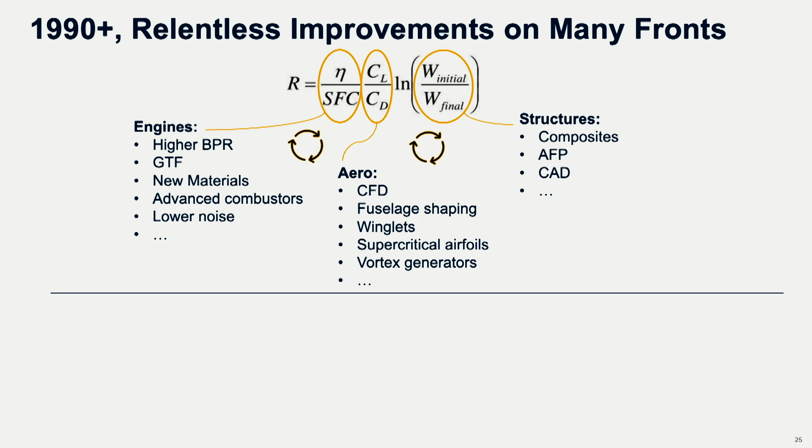From 1990 onwards, it was just relentless innovation on so many fronts across the Breguet range equation. So if you just go back to first principles, it was higher bypass ratio engines, geared turbofans, new materials, advanced combustors, low noise. In the engine space, in the aero space, it was CFD, fuselage shaping, winglets, supercritical airfoils, vortex generators, and structures. We created computer-aided design. We used composites and automated fiber placement machines. That's just on the Breguet technologies.

You just heard so much from Amy and the other presenters about the pilot-supported automation tools. We had more fly-by-wire. We had glass flight decks, auto TCAS, ETOPS. ETOPS started to make the world connected in a much better way. We had HUDs, GPS, wide area augmentation systems, precision nav, on and on. Market trends, globalization, airline consolidation, LCCs. I can go on. What does it look like in the data?

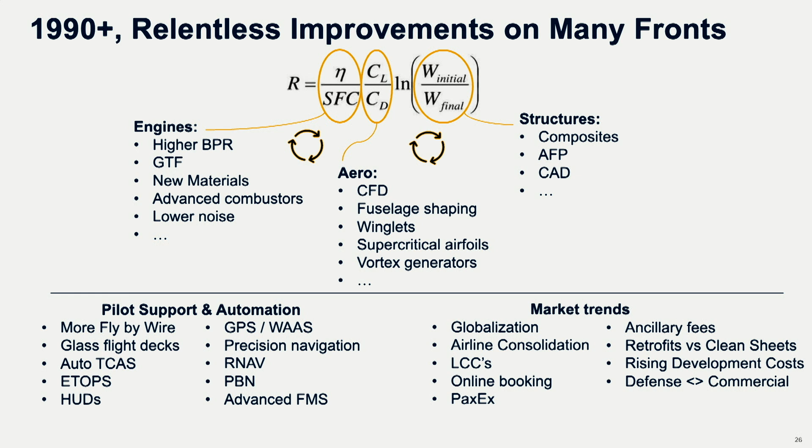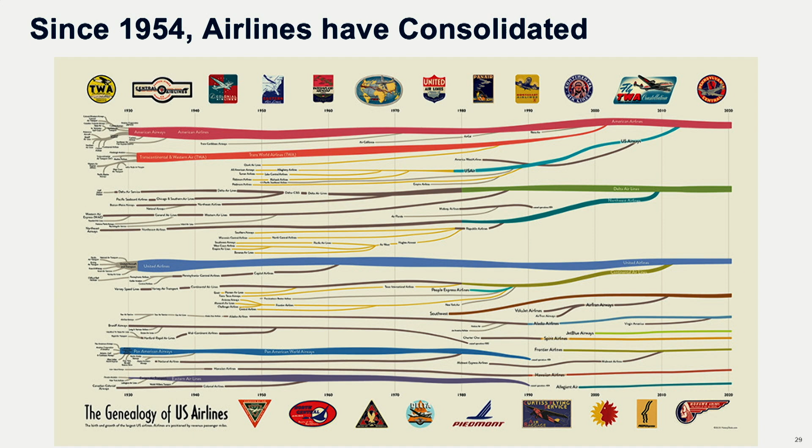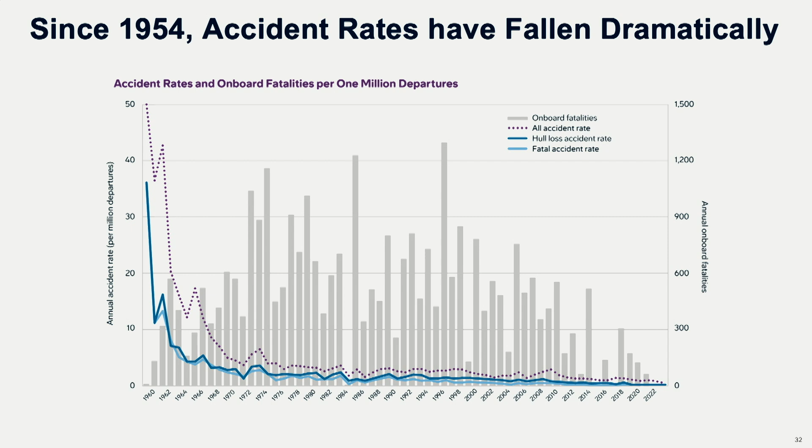So during that Hansman, what does that look like? That looks like global connectivity, safety, and efficiency. That's what that era is all about. It's the dawn of commercial aviation. The invention of every single airliner happened during that Hansman.

The scaling of a whole industry, the optimization of all the operations, the global economic impact of building all those airplanes, of running all those airlines, the safety improvements that we talked about, the relentless technology optimizing, 9/11, which was maybe the biggest impulse into the system from a safety standpoint, from an operational standpoint, airline consolidations, the market maturity, and ultimately delivering a system which I still view as a modern miracle. It's really cool.

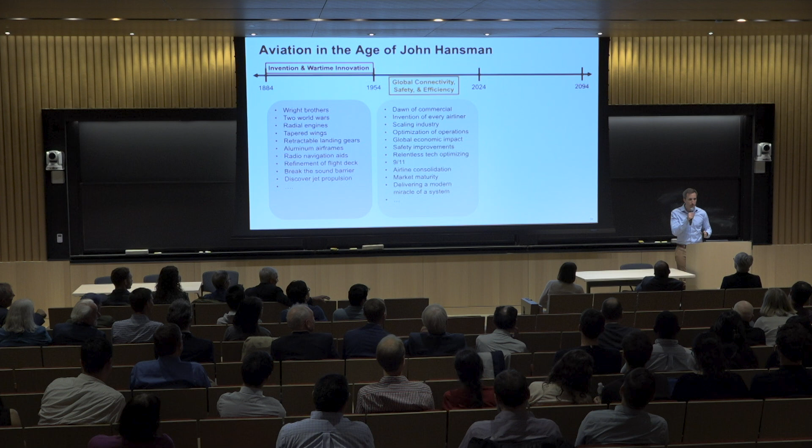I still, to this day, get really mad when people close their blinds when we're on an airplane, because I want to say, thank you for clapping. So I want to say, don't you get it? Didn't you look around? You're paying $100 to fly across the country in a tube in the sky at 500 miles an hour. It's amazing.

So that happened during that Hansman. What happens in the next Hansman? All right, that's what I think my job was here today. But I needed to get through all that first. So I reflect on that and I say a lot can happen. It's hard to say, one Hansman. I just keep laughing now. A lot can happen in one Hansman. And it's really, really, really hard to predict.

If you started at the start of that, you would not possibly end up at the end of either of those stories that I told you. But it's a fool's errand. It's what my job is here. I'm a fool and I'm on an errand and I'm going to make predictions anyway. And so I think the next Hansman is about these three things.

I think it's about sustainability. And the way I view that is I think that efficiency still matters, and I'm going to talk about what that means briefly. But getting to zero climate impact, I think, is going to end up mattering more over time.

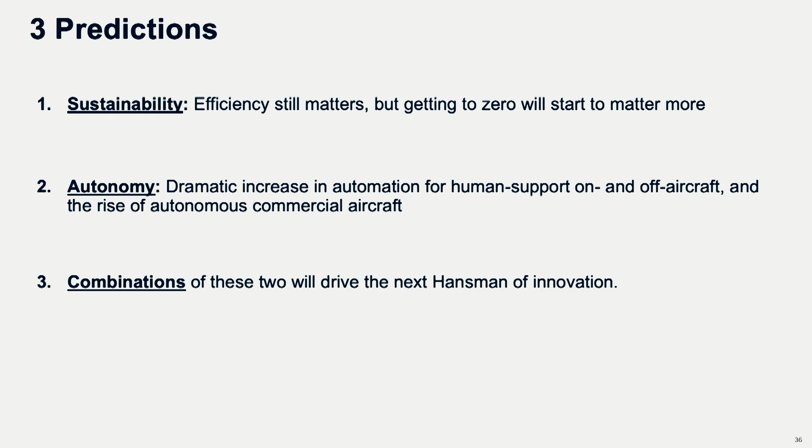I think it's going to be about autonomy, both automation, where, to Amy's point, humans and automation are working together, both on and off the aircraft, including in the air traffic control environment. And I think that we will start to see the rise of autonomous commercial aircraft over this Hansman. And I think we're going to see really amazing combinations of these things that are just simply impossible to predict, standing at the start of this Hansman and wondering what it's going to look like at the end.

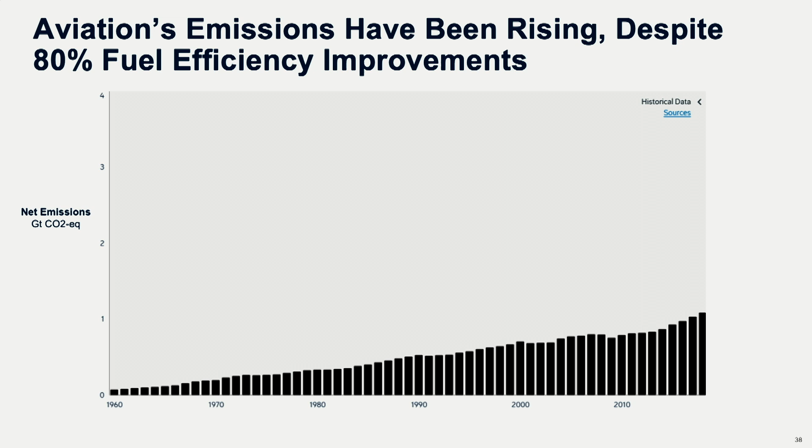Okay, so on sustainability, today, 39 million annual flights, 1.1 gigatons of CO2 equivalent emissions, and 2.5% is aviation's share of global emissions. Despite all the unbelievable miracle of science statistics that I just showed you, aviation's emissions have been rising despite the 80% fuel efficiency improvements over time. And that's because growth in aviation is outpacing our ability to make the aircraft more efficient. And that growth is good. It means that people want to travel. We should still continue to allow people to travel, but we've got to pick up the pace.

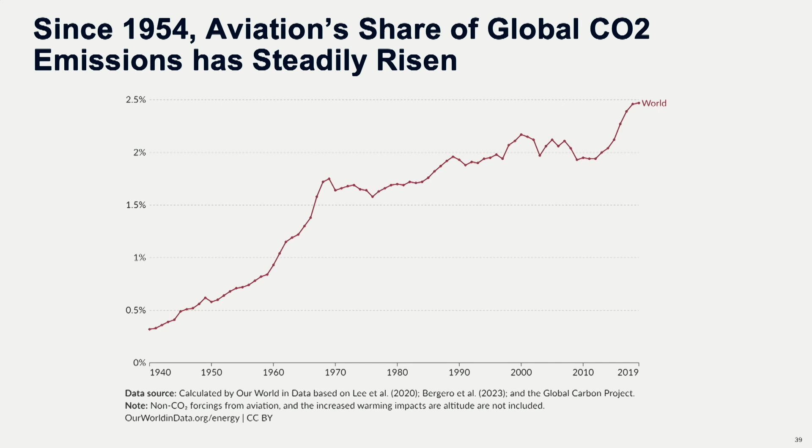So aviation's share of global emissions is actually growing over time, despite all those improvements that I just mentioned. It's not because aviation's not improving. Again, it's because we're flying more than our improvements are coming in. And also, many other industries are decarbonizing faster than aviation. So this number is going to keep going up. Our 2.5% today is going to be a bigger number tomorrow, and that's a problem.

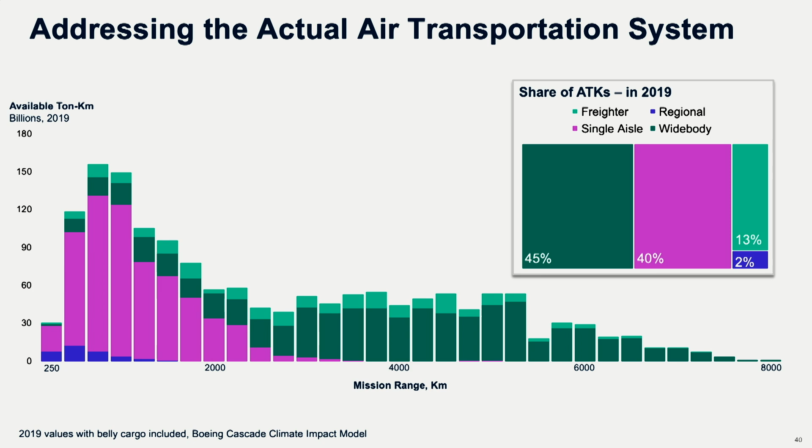So if you start looking at where the potential emissions reduction opportunity is, I'm going to talk in just a second about the opportunity of electrification and some other things. If we look in the, call it sub 500 nautical mile space, it's about 14% of the total emissions. And so this is great. We have a lot of innovations that can start to address this market space with electrification. There's a huge addressable flight opportunity, which makes it a great business opportunity, and that's why you see a lot of companies coming into this space, because man, that's a lot of flights to go potentially try to address.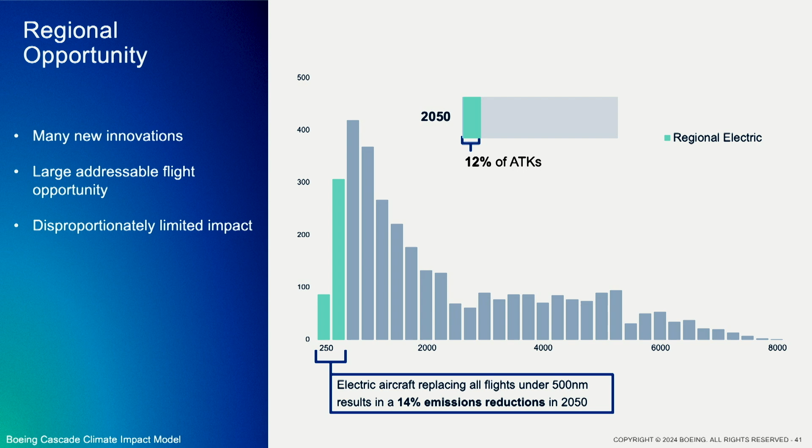But it has a disproportionately limited impact. Even if we electrify every single one of those flights, we've only solved 14% of the problem. We have another 80% of the problem to go. So where are all those? I can go on and on about this subject, but I'll just briefly say, if you look at wide bodies as just one example, they're somewhere around, call it half the fuel and about 10% of the flights. So if you want to address the problem, you have got to address how this segment of the market is powered. And it's not just the emissions out of the tailpipe of the aircraft.

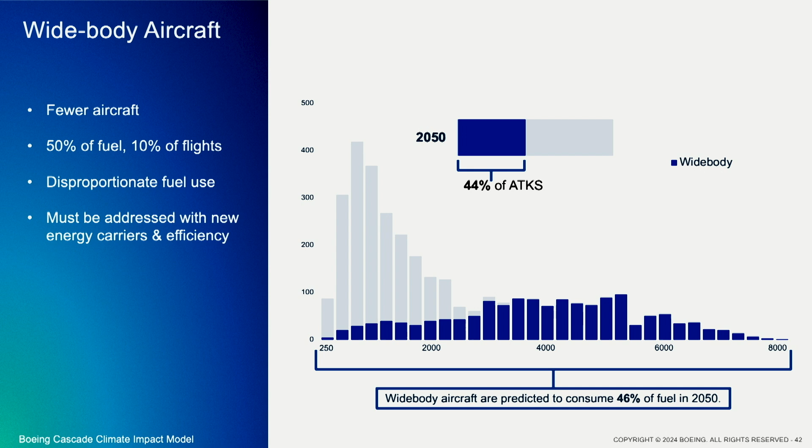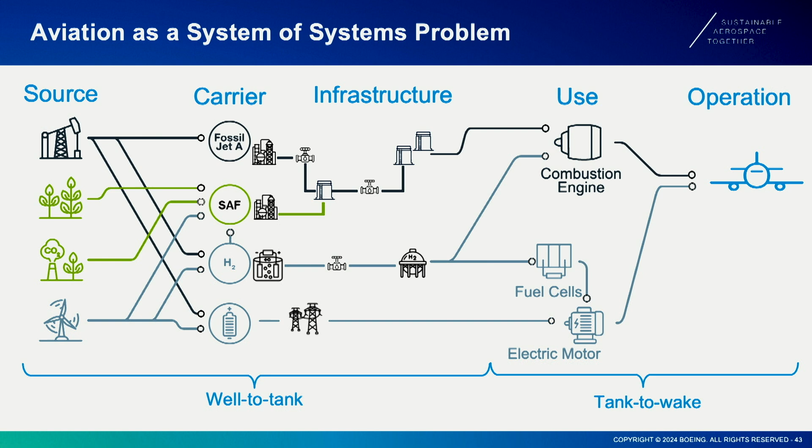One of the things that we've been doing in ICAT especially, and what you'll see in a second in a tool that I'm about to show you, is that we have to think beyond the aircraft. We have to think about aviation as a system of systems problem. Where do you get the source of the energy? How do you carry it? How is it transported? How do you use it on the airplane? And ultimately, you get to the total climate impact. So how do we do the full life cycle accounting of all the climate effects?

So something that the Boeing team is now leading that I was really proud was really a derivative of the work of I think now decades of thinking in ICAT, is how to create tools that bring all of that together in a quantifiable way that is truthful, that's based on the facts. It's not based on people's feelings about sustainability, but it's based on the literal facts of doing all the math of the system that I just showed you. And that's a tool that's now online, and you can go check it out. And one of the results of that is that it's going to take a lot of different tools.

So here's just sort of a very simplified view of how I think things may play out in the next Hansman era. I think there's going to be very obviously new energy carriers on the left. So we're going to need massive amounts of sustainable aviation fuel. That's obvious. There's no way through the next couple of decades unless we have tons and tons of sustainable aviation fuel that doesn't exist today. And that's going to take the form of biofuels, and it will take the form of e-fuels. And there's a whole long discussion about that.

And the Lab for Aviation and the Environment, which John now leads, by the way, that lab has been pioneers in thinking about alternative fuels and so on. I think there's opportunity for things like hydrogen, maybe other fuels of this type, and obviously battery electric and electrification.

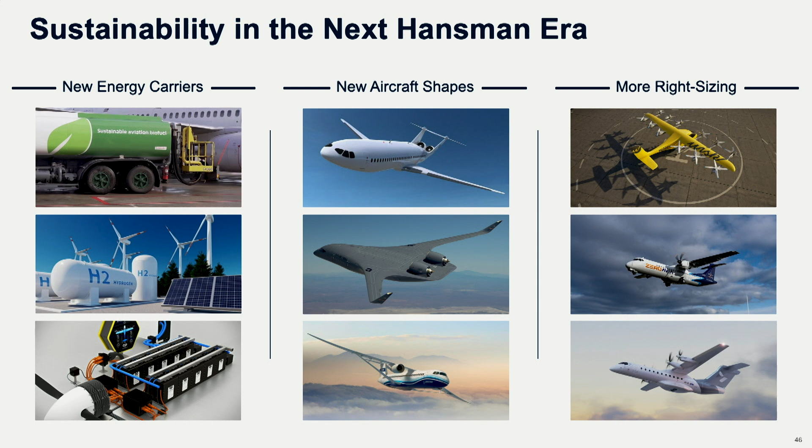I think we're going to see new aircraft shapes. One of the great things that came out of the MIT department over the last few decades was the D8 program, and that's obviously the first aircraft on the top there, which I'm very passionate about, having spent many years on. I think that we're running out of room on the tube and wing aircraft to make the efficiency improvements, which is why you see that chart that I showed. The marginal improvements are getting smaller, and so I think that there's opportunity for new aircraft shapes.

And I think one of the things that I was very passionate about in my PhD research was this idea of right-sizing aircraft, and that's what John and I had spent quite a bit of time thinking about. Can you make aircraft that are tailored specifically for the mission that they're intending to operate? And I think that's where you're starting to see some of what people are calling UAM or regional air mobility or these other somewhat tortured terms. But what you're seeing is aircraft that use particular new energy carriers to be more right-sized for the mission.

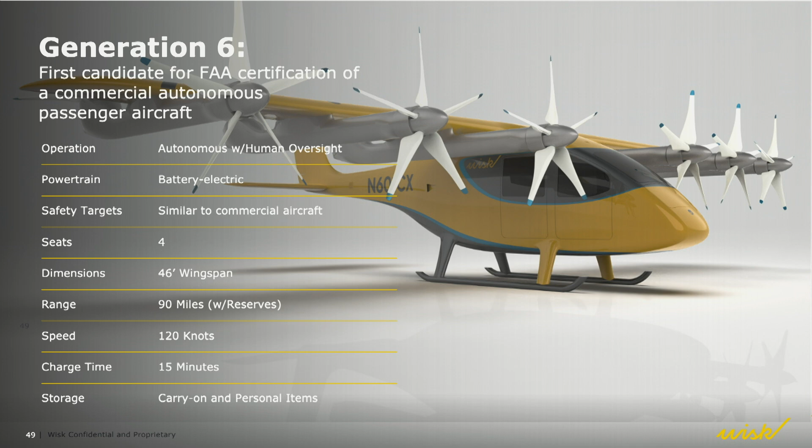The safety targets, when you get into things like doing the ARP 4754 and the FMEAs and so on, are things like catastrophic hazards at 10 to the -9, DAL A, no single points of failure, so on and so forth. So similar to commercial aircraft. Now the problem with battery electric airplanes, and what John will show you as an innovation tomorrow on this, is that they can't fly very far. So this airplane flies less than 100 miles. It carries 4 people. And it charges quickly.

These are the kinds of systems that are on board. We are an incredibly vertically integrated company. We make nearly every system on the airplane, which makes it very fun. So it's a composite airframe. It's actually a bonded composite airframe. We use things like SQRTM and some other out-of-autoclave technologies that enable high-rate manufacturing.

We build our own computers. We build our own software for those computers. We build our own battery packs. I'll show you what those look like. Electric motors. It's obviously a fully electric fly-by-wire airplane. And sensing, navigation, landing, I'll talk a little bit more about just briefly.

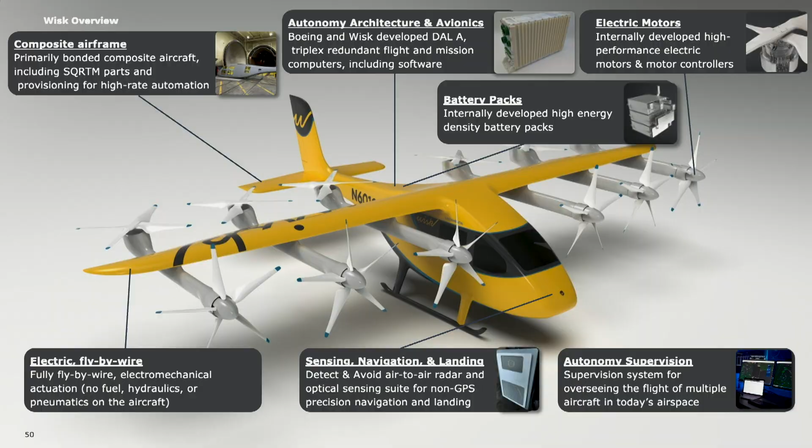For those of you that have an electric car, it's a pretty amazing thing when you really look inside of your electric car. These systems are unbelievably simple. And so here I'm showing just a little bit of what an airplane looks like when there's no fuel in the wings. This aircraft, obviously, doesn't have a turbine. It doesn't have hydraulic systems. It doesn't have pneumatics. All that it has, in big quotes, is high voltage harnessing, low voltage harnessing, batteries, motors. That's it. Computers.

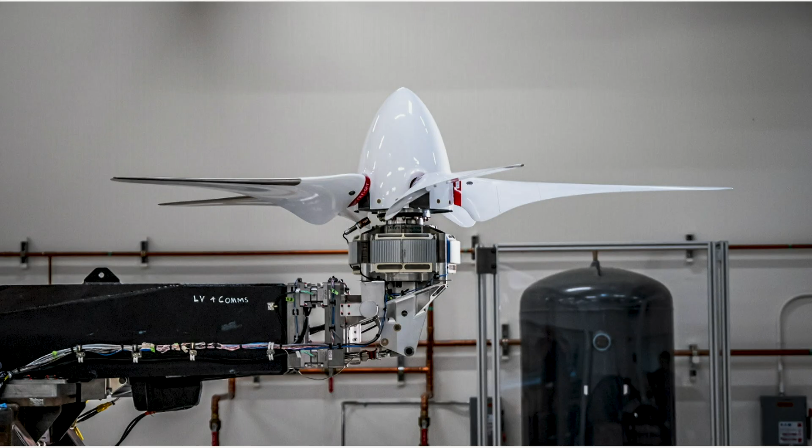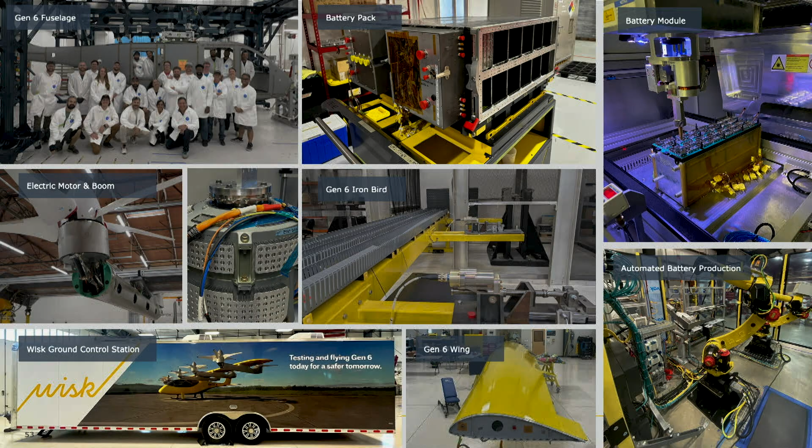The motors look like this. I think it's unbelievably impressive what you can create with electric machines. This has about the same amount of power that you would get in a Lycoming engine that's on a small general aviation aircraft, and it has very, very few parts. We're in the middle of making all of that right now out in California, and we expect to be flying this first version of the Gen 6 airplane within the next couple of months.

But that means that right now we're building all those battery packs. You can see up in the top right there, the battery cells that we use are similar to what's in your cell phone. They're pouch cells that are almost the same form factor as what's in your cell phone. We put them in aviation-safe battery packs, which is a whole very interesting research subject. We make those motors that I just showed you. We put it all on the ground in complex things like Iron Birds and make sure the software works and all the rest.

We have to think way beyond the airplane. I hope that you understand that now from the discussions that we just had from Craig and JP and Amy. So these are all the things that we have to pioneer in order to advance our autonomous operations. Trust me, it would be many orders of magnitude easier if we were doing this with a pilot on board. We're really trying to advance all the enabling elements of what the FAA is starting to call the super system for autonomous operations. That starts to look like this.

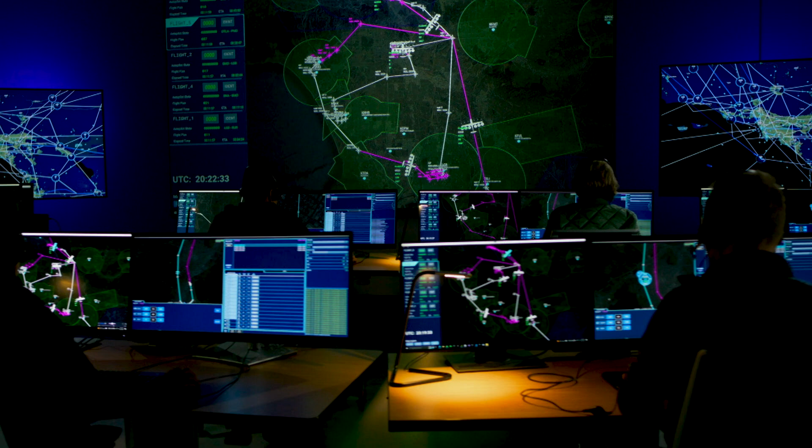I put this up here because I think this is very interesting to dovetail with what Amy and team just showed, is the way that aircraft may be supervised in the future. This is an actual picture from how we actually supervise the airplanes. That's the word that we use. All of the human factors for how that's done is new work to do. It's new research. It needs to be done with appropriate human factors so that it's safe. It's a whole new world to go and derive lessons from the past and apply them to the future.

This is the FAA Tech Center in New Jersey, which was really fun to be back to because I think many of us went to the JUP talks with John at the same center. And so we actually are running simulations with the Wisk airplanes in there now. We take all the sensor packages and compute and all the software and whatnot, and we do things like detect and avoid trials on surrogate helicopters in California using many of the lessons learned that John Langford taught me while we were together at Aurora Flight Sciences.

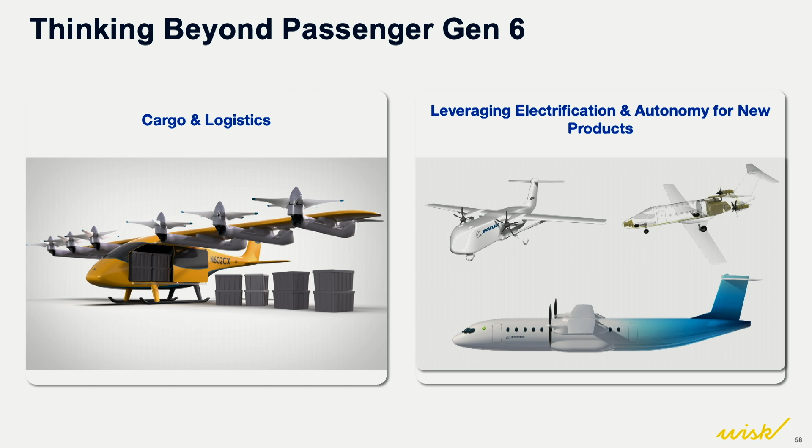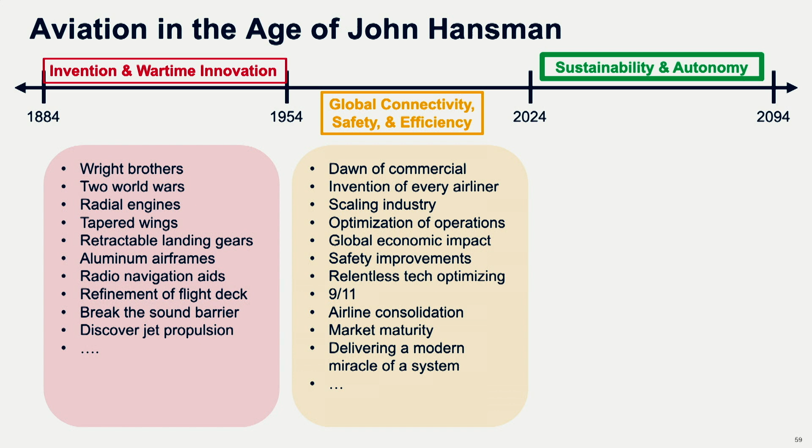And so it may not stop there. There may be things that go beyond Gen 6, so things like cargo and logistics and other electrified products over time, which is really fun to think about. So bringing it back to our timeline, I guess it is a little bit of a fool's errand to try to predict the future, as I mentioned. But if I have to, I would say it's probably the era of sustainability and autonomy. If I were guessing, and I will leave with this, if I look back at that history, what I see is that most of the products that I showed you were the successful ones.

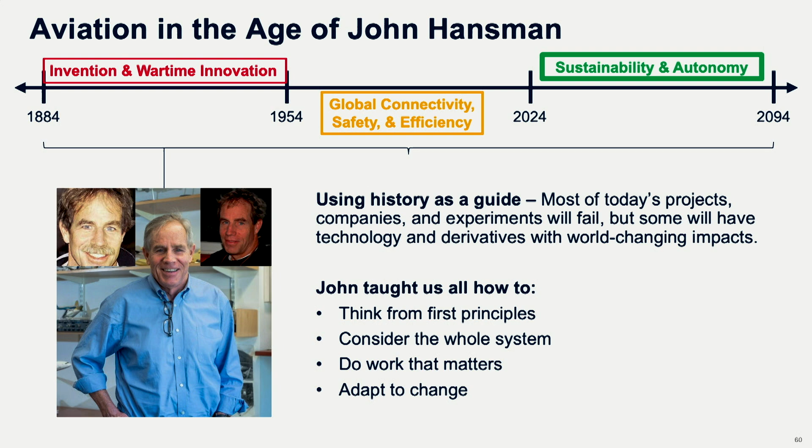But when you really pull the thread on the super interesting innovations and people and projects and companies and all the things that went into creating all of those, almost all of them failed. And I would say that that's probably the world that we're in right now, where it's not obvious what the ultimate landing place is for all these technologies. It's not obvious what are the successful products in this space. It's not obvious what are the successful companies in this space.

But John taught us a bunch of stuff, which is thinking from first principles. He taught us to consider the whole system, which I hope you heard reflected from our completely not coordinated talks today. He taught us to do the work that matters, not just publishing papers for publishing papers' sake, but to try to drive those numbers that I showed you on the slides ever higher and lower based on which direction is good, and to adapt to change. And so I think we're all pretty well teed up to go after the next Hansman. Thanks.

Wonderful. Thank you so much for those outstanding talks. We have a few minutes for Q&A, so I'd like to invite our speakers to come up, and we can open it up to the audience. Please come up. Yeah. Go ahead, John. Yeah. No, I'd like to ask John Hansman. Why don't you take? Yeah.